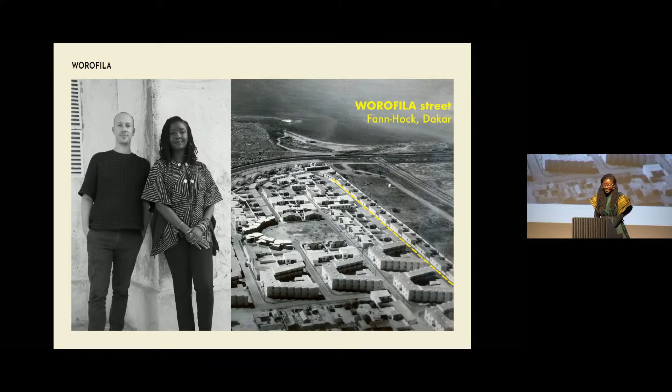So as Jeannie said in the introduction, this is the practice with the co-founder Nicolas. We are based in the historical neighborhood of Fann-Hock, and we borrowed the name from the street that you see to the right. We still have our offices there. This is the place where we met, and the place where we're still located. We're very attached to this neighborhood, which has remained quite residential, and it's a bit of an enclave in Dakar.

This is just to show a few of our projects that we've done in the last 5 years. Many of them have been collaborations with other architects, and they range from residential, public buildings, office buildings, and some exhibitions and research work as well.

So just to start off with the Senegalese built environment, I chose to showcase this map, also to locate where we sit. Senegal is the most western country in Africa, and Dakar, the capital, is the most western city of Senegal, and of the continent, therefore.

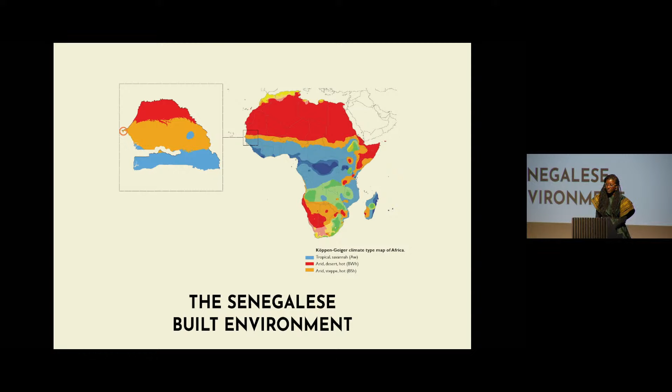This is the climate type map of Africa, so we sit within the Sahelian, arid, hot and arid climate, and sort of tropical savanna climate in the south.

And the reason why context and geography matters is that in the case of Dakar, it's what gave its name. Dakar sits on a peninsula called the Peninsula of the Cape Verde, the Green Cape, because it used to be so green that European explorers, when they first encountered it, named it the Green Cape.

It's very striking to go from something that used to be called the Green Cape to this sort of sea of concrete, all gray.

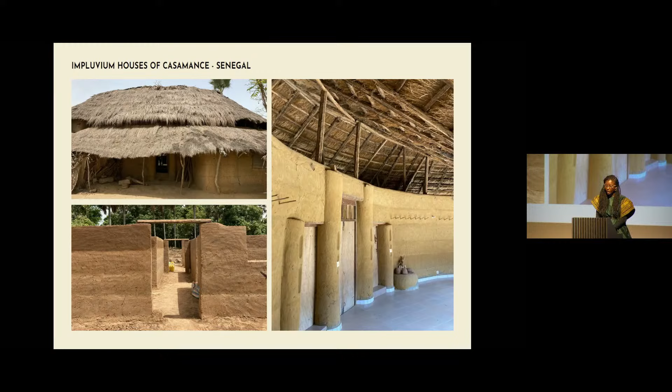The picture at the bottom is really precious to me because it showcases that there are still, in some pockets, remnants of knowledge and know-how of how to build with the same ancestral technique. With this picture we get a lot of information about the geography of the place. We clearly see the type of materials available, from earth to hay to timber, but also information about the climate, since a very pitched roof with overhangs tells us about the amount of rain that falls there.

The impluvium house is centered around an atrium, which collects the rain but also provides light, or is the main source of light. These houses are quite unique because they sit in a context where historically people had to live within the houses, so it actually acts a little bit like a fortress, and you have the ability to house a very large extended family and the animals, usually with a single entrance.

Generally, the atrium, or the rain that is collected, gets kept there, but it can be evacuated usually with a subterranean pipe, which often goes to an outlet where the animals can actually come to drink it.

And the other main important architectural component is the fact that you have this roof that overhangs and creates a sort of shaded walkway around the walls, protecting them from rainfall as well. And the shade also provides thermal comfort.

Another important component of bioclimatic design is natural ventilation, for which we have to look at the various dominant winds. We have two main seasons in Senegal: a dry season that lasts roughly 8 months, and a rainy season which is about 4 months long. During those two different periods we have different dominant winds, so it's really important in designing buildings to position openings in relation to those winds.

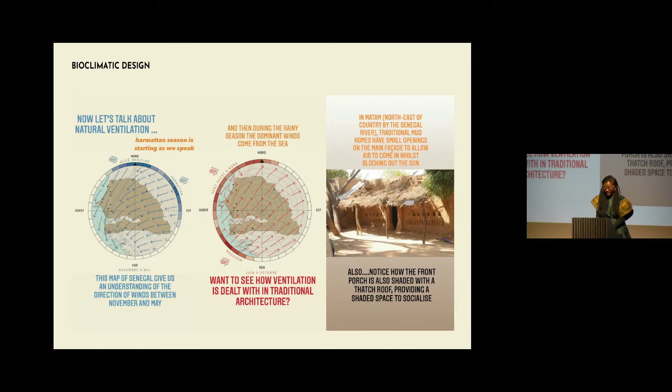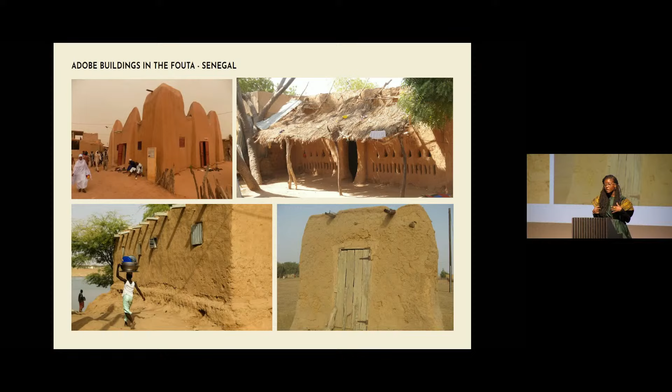This is architecture from the north of Senegal, from the region of the Fouta. The technique there is usually adobe, mud bricks. You can also clearly see that the typologies are very different than those from the south, again in line with the climate in the north, where there's very little rainfall but also very little trees and type of fibers to build roofs. So there's always this interconnectivity between the availability of materials - in this case there's also clay on the banks of the river Senegal - and the climate, and the way in which those materials are put together to fit the specific climate.

There's a very beautiful university campus in Dakar, the University Cheikh Anta Diop, which I think has a very wide showcase of what tropical modernism looks like. We have a lot of examples of these buildings with various examples of solar protection: double skins, brise-soleils, and concrete breeze blocks as well.

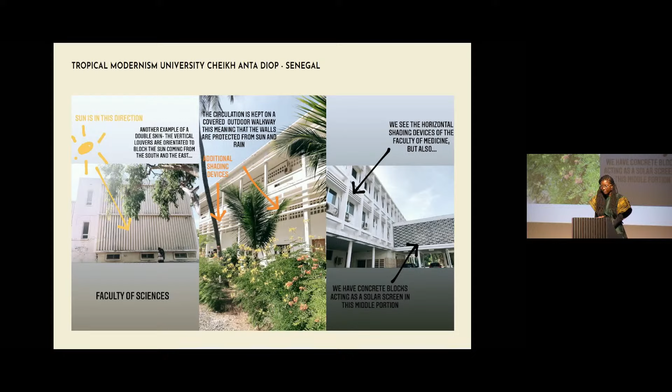So now, starting with really the projects and what we do, it was important to showcase the very basic principles of bioclimatic design, which really have to do with orientation, ensuring that we have natural lighting, natural ventilation, preventing any type of heat gain.

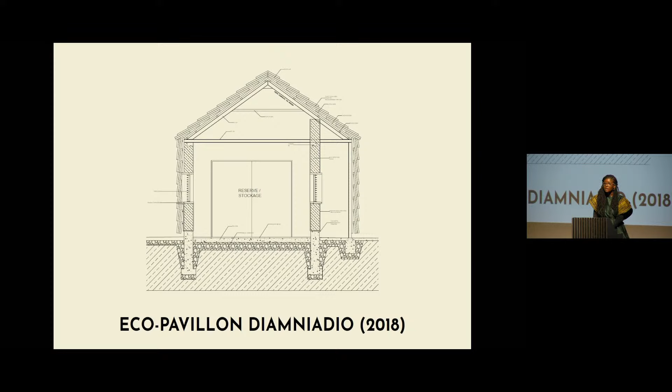This was a project that was commissioned by the government, and the idea was to showcase how earth and Typha could be used in various ways. And what was good with it is that it enabled us to do quite a few experiments.

So this is cut and woven Typha used on an adobe building. This is unstabilized earth, and it was placed on the facade in order to protect it from rainfall, with a very simple detailing of having some metal frames and just hanging these panels on the facade.

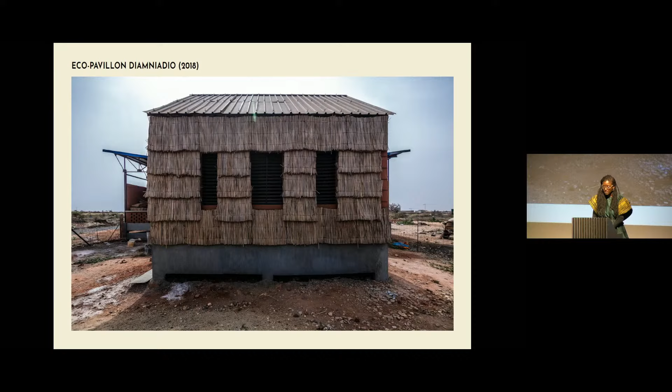And this is obviously also an attempt to kind of create a new language with these sort of bio materials.

Another thing that we were experimenting with is using it as an acoustic ceiling, just using a very simple grid instead of placing plasterboard. The typha was just cut in this 600 by 600 millimeter grid and placed there.

And surprisingly, this is the typology of a classroom. It has really great sort of acoustic absorption qualities as well.

The complex of the building at the bottom is essentially a series of different buildings using different techniques as well. And this was a building that was also meant to be demonstrative and also allow some scientists to make measurements and see how the building performs thermally over time.

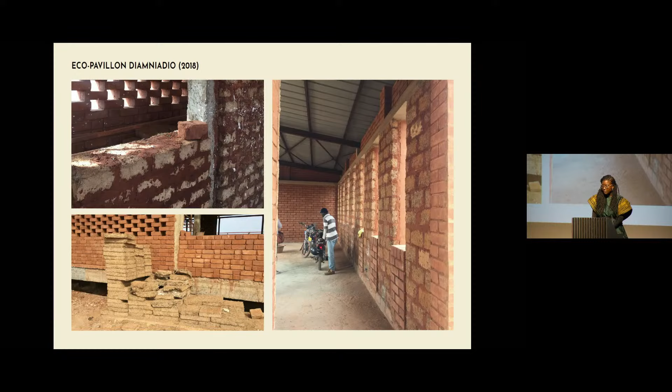Some other parts of the building use a sort of mix between earth and Tifa to make these adobe blocks that can be used, for instance, for wall construction.

There's another opportunity that we get with typha when it's dried and crushed and mixed with clay, it could be used to make these blocks, similarly to making adobes, but these particular blocks are used for the roof and roof slabs construction.

This is what they look like. So it's a very simple process of essentially crushing the typha, mixing it with dry clay, preparing a clay slurry, and then mixing it all together.

Compacting it into this metallic mold, and then taking it out. It gets sun-dried, so it just needs to be a little bit of space to dry it. And then this is the assembly.

If you remember the picture from Dakar, you'll see a lot of flat roofs because of the climate in which we are, and that makes the roof the most exposed facade. It's very much the fifth facade that gets the most solar exposure, and definitely heat and potential for heat gain as well. So this very simple solution, which does not require any additional skill, replaces the concrete blocks that are traditionally and commonly used, and has great potential to reduce the heat gain in buildings.

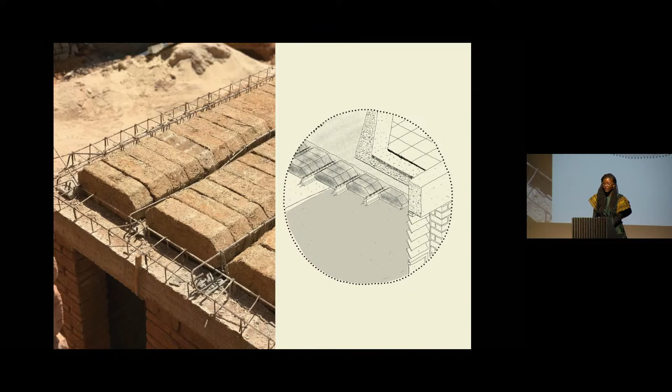The second material I want to introduce to you is earth. In our case, what we work with a lot is laterite, which is a type of rock, or soil, that has a very high clay content. When working with sort of clay-rich earth, it is a very tactile and very visual component. It's easily recognizable whenever you go to a place by just looking at the composition, for instance, in this case, when it's dried.

This is what laterite looks like once it's freshly excavated. But laterite is not the only type of earth that exists in Senegal. There are many other types of clay-rich earth, like these ones, which were taken from a study a few years ago, going around Senegal and selecting all of these different types of clay-rich soils, each of which has different composition and amounts of clay, silt, sand, and gravel.

These are the type of tests that are done in order to understand some of the plastic qualities, mostly of the earth. This is done in the factory that produces the bricks that I'll show you.

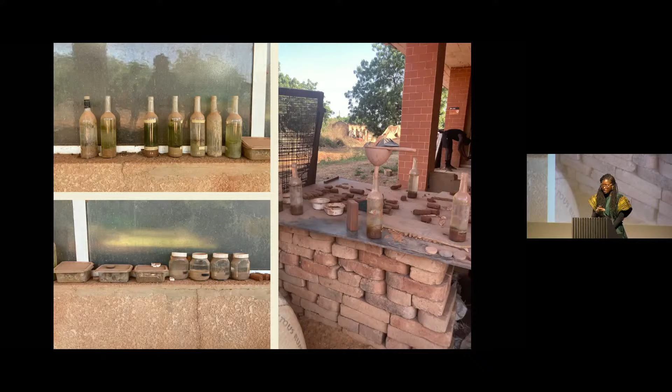These are more images of some of the tests performed. The other one is the bottle test, another easy one to do, where the earth is mixed with water and shaken, and then once it's left to rest, the sedimentation process happens according to the different density of the particles, so you can see the ratio of clay to sand to gravel in each type of earth. So back to the laterite, it's something that is very abundant, mostly in the Dakar, Thiès region, closer to the capital.

This is what the quarries look like. The laterite is extracted either manually or with these machines, and then it's crushed and sifted. Once it's usually brought to either the site or the factory, and then it gets processed.

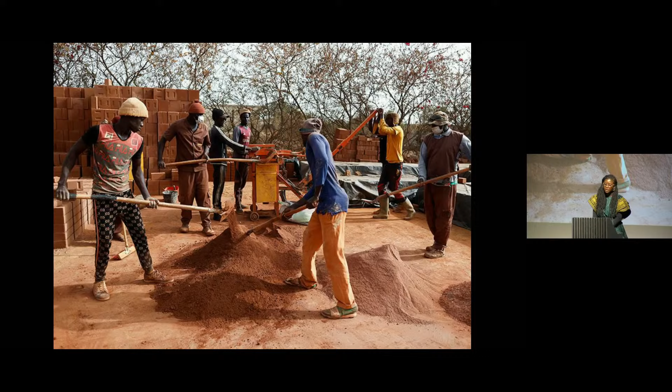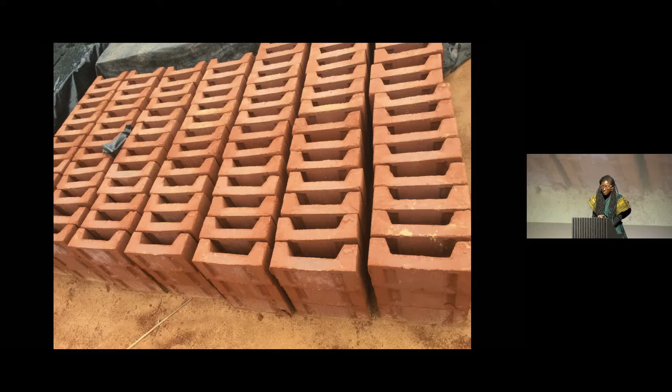These are the U-shaped bricks that are used mostly for lintels and sills, again showcasing how plastic these are.

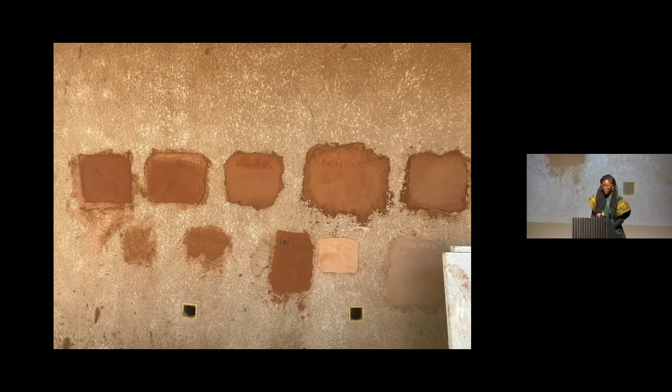These are some bricks that are also made with the admixture of different types of sand found also in Senegal. Some are lime sand, other ones are more dune sands, which change the color aspect of it. And this is in the factory, some tests done for plaster, depending on the kind of mix and ratio between laterite and sand, to see what holds and how it ages over time.

So this is the first project that I'm going to share with you. Sorry, I've left the dates, but the projects aren't presented chronologically. I've just chosen this one because, although it was done for an exhibition, it was a moment for us to display the various techniques and approaches we have to using the earth bricks.

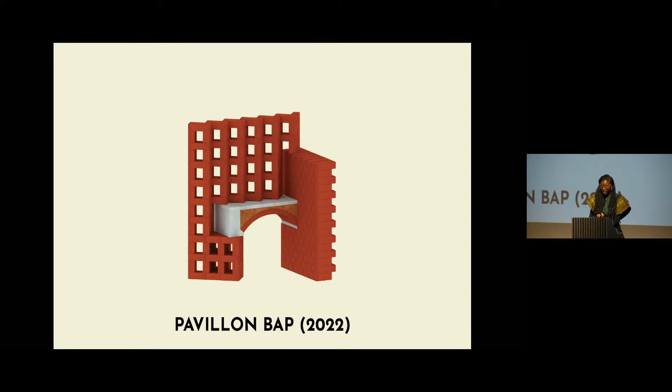So again, going back to this understanding of the climate, we've developed a kind of materiality in which we use these modular elements, assembling them in a way that works for the climate. In this case, this was a reflection on the assembly of bricks for two different types of facades.

So you have the southern facade, or it could be the northern if you're in the southern hemisphere, which is the one facing the equator and gets a lot of sun. In our case, because it's a hot climate, we want to protect the building from the sun. So there's a first showcase of the brick assembly that provides shade onto the wall by having every second course overhanging.

On the other direction, when we look east-west, that's the direction of the winds. Especially in the hot months where ventilation becomes even more critical, it's along the west-southwest, northeast direction. So we have the opportunity to assemble bricks at an angle in order to ensure and provide natural ventilation.

And this is the process of actually building the walls. This was in Versailles, at the School of Architecture of Versailles last year, done in situ with one of our key collaborators, Illuminates, who is the owner of the factory that produces a lot of the bricks that we use. These bricks are made in France.

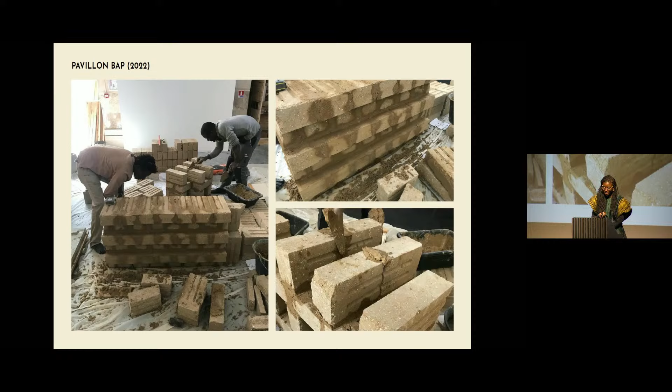Another thing we wanted to showcase is the ways in which we build floors and also roofs. The top one is the beam and block construction technique I've shown earlier, using these earth and Typha blocks. But there's another possibility: using the same earthen bricks to make vaults, because earth has very good compressive strength, so we can make this self-supporting vault.

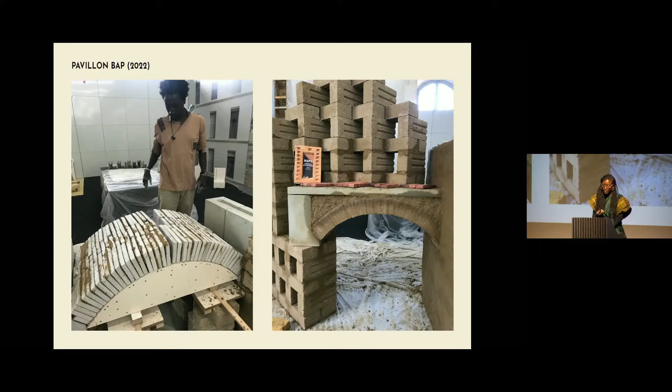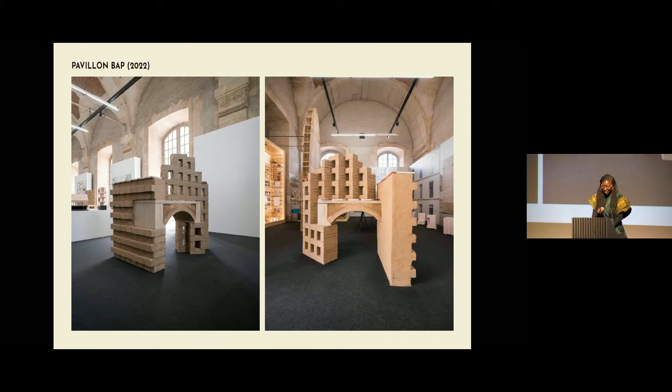For this we actually used some ceramics, so fired bricks. In the assembly, we found a way to combine the north-south wall and the east-west angled walls as well. This vault is infilled with a mix of Typha and earth for either acoustic or thermal insulation. The result is this lovely pavilion that we exhibited for about a period of 2 months, in the interior space of the School of Architecture of Versailles.

So another one of the projects we've done, one of the earlier ones, what I'll share is the process of constructing a dome. This was a house in the region of the Sine Saloum, and this is, I think, the first house that was built. The clients wanted a dome in the living room, and we were able to do it using the earthen bricks.

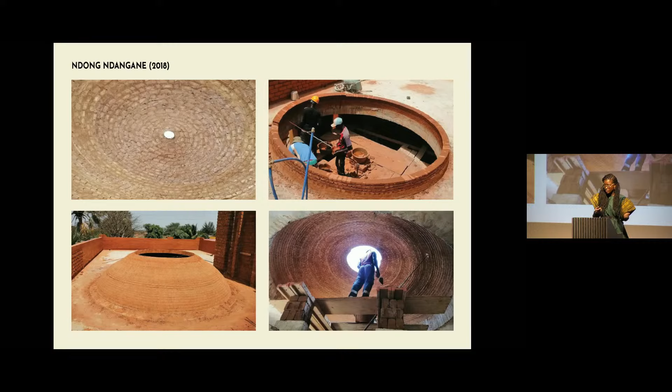This was an interesting exercise to see during construction. There's a type of string or rod that is used every single time to measure the radius of what would be a sphere, in order to ensure that as the bricks are laid by hand, the geometry is respected. The house in general is built using compressed and stabilized earth bricks.

Everything's load-bearing, and the clients as well as us wanted to explore all the load-bearing capacities of earth construction. So there's a display of full load-bearing walls, some arches for the windows, some corbelling in the entrance, domes, and the ability to create these kind of perforated walls using a very careful assembly of bricks.

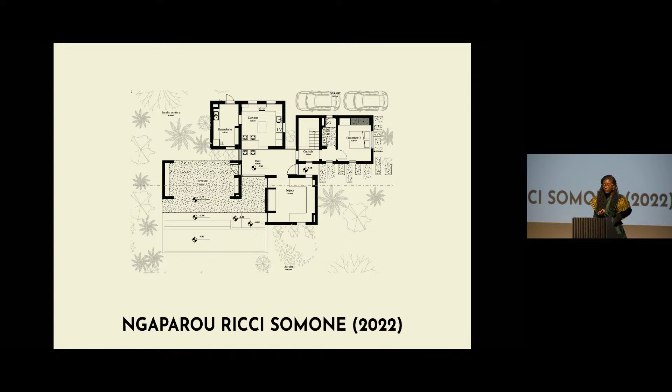There's a second residential project, still ongoing, that also enabled us to continue exploring the load-bearing capacities of these earthen bricks. It's a residential project just under 200 square meters. Other than the terrace, which needed a very large opening because it faces the pool, all the other earthen walls are load-bearing.

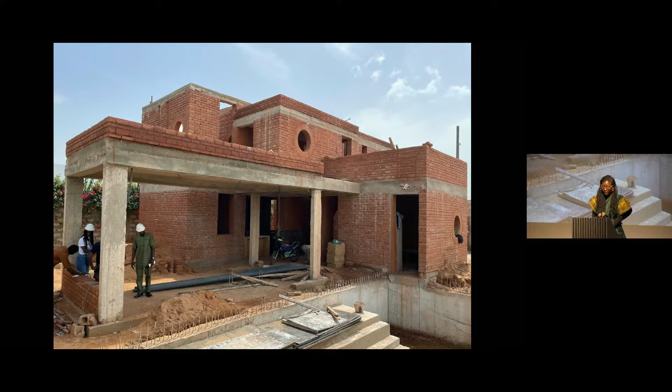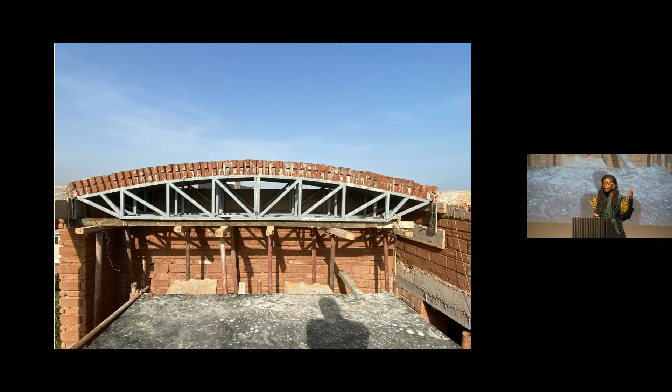The most exciting, and I think most challenging part for the contractor, was making this brick vault, which on the top level is the main roof of one of the bedrooms. It started with the calculation of the vault, which we did in collaboration with Elementerre.

The founder of Elementerre trained at the School of CRAterre. He's an engineer by training, but also knows how to make structural calculations. For the vault, although we have our own methods of calculation, I always want him to check them. He does this through a simple geometrical exercise, sectioning the vault to find the barycenter and create a line of load, checking whether it fits within the geometry of the vault. This was the original one, and it worked.

In the previous project, you saw the dome exposed and not insulated. What I wanted to do here was find a way to lower the height of this vault in order to infill it with earth and Typha for insulation, so the earth brick layer wouldn't be exposed to the sun, since the space below is interior, habitated, and could still transfer heat gain.

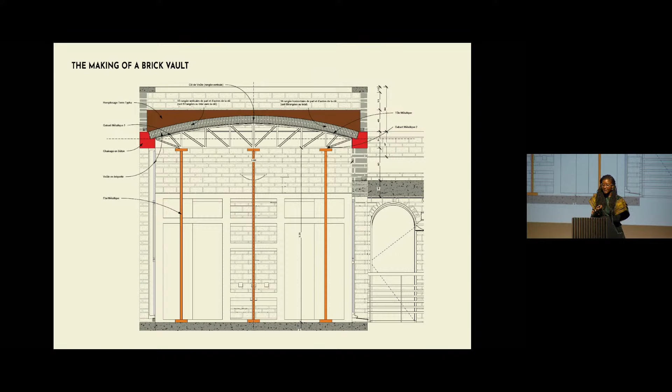We had to design it so it could be taken out through either a window or a door, so it was done in two parts and assembled on site. It could only be about 800 millimeters deep. This is how it was assembled, and on top of it these smaller bricks were placed.

There's a sort of load-bearing - the load-bearing roof structure.

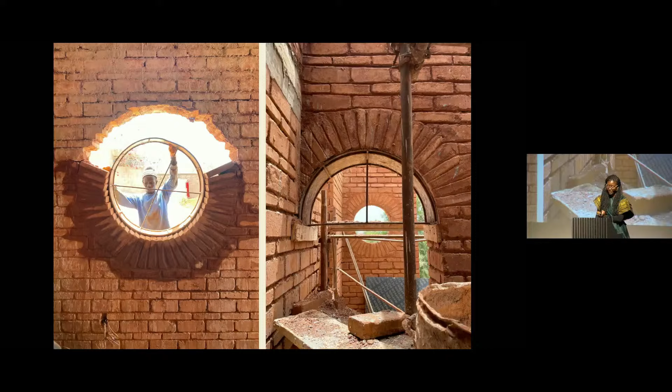It still needs to be finished, but this is what it looks like. These are the other processes - although the one on the left is a corrective measure, because the initial circular window wasn't done properly, so it had to be taken out and redone, mostly because the shuttering used for it, which is just a metal frame that can be reused on site since the circular openings have the same dimension, wasn't perfectly round and wasn't sturdy enough. So you had a kind of initial deflection.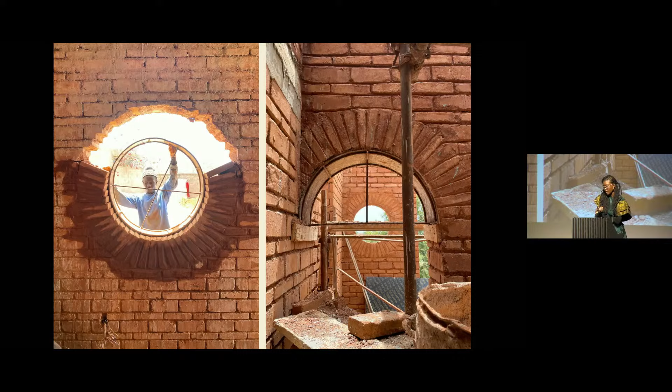The same methodology is used to make these arch openings, and this is the result of it, and me on site.

One more project that I want to mention, that was quite defining, is this house, which became the ground for a lot of reflection and experimentation, especially with local material. This is the first project that I oversaw in terms of construction. I think it was definitely the biggest teacher in terms of bioconstruction locally.

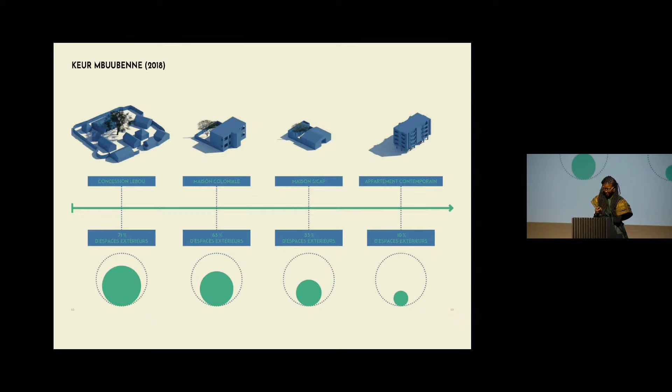The first thing is that this is also an extract from another research project looking at the evolution of housing. You can see that traditional housing is this aggregation of rooms around a central space used for gatherings, eating, and communal living. Over time, what we realize is that you have this evolution of typologies, and nowadays a lot more contemporary construction or housing takes the form of apartment buildings.

The plan, or at least the composition of the house, was done on an existing concrete build that was not finished. It had this L shape, and I thought it could be interesting to actually recreate for this family house the cellular structure of the traditional compound. This was done by reusing the existing concrete, but also making sure the extension was built with earthen bricks.

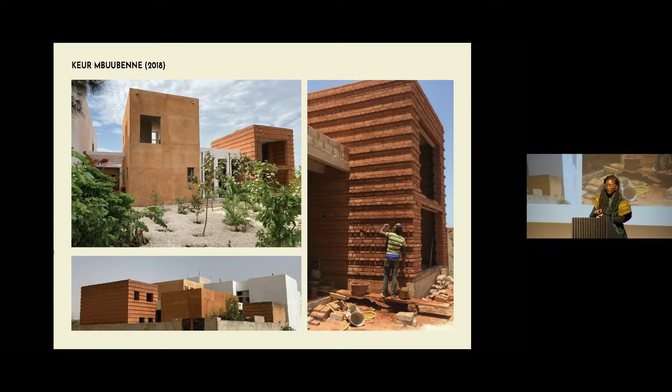The bit in concrete has just been plastered using a cement plaster, but it's stabilized and colorized with laterite, while the other ones are just the naturally raw bricks. You can see the detailing with these overhanging bricks that also create shade onto the walls.

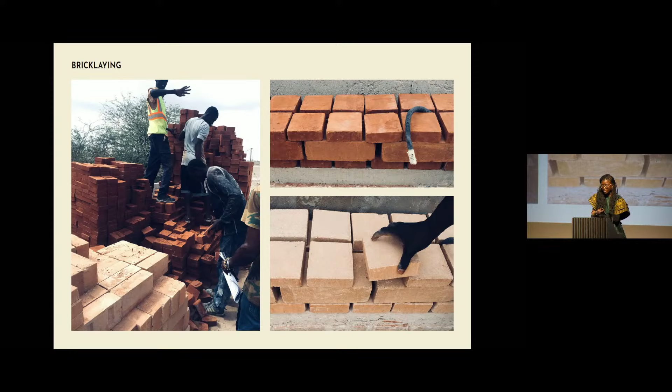I'll just walk you a little bit through the process of bricklaying. When working with this particular technique, the assembly of the bricks is very critical, because in order to make load-bearing walls, we have to control where we put the joints and ensure there are no vertical joints. For this project, there are two different types of earth mixes used - one mixed with lime sand, which is why it has a different color. But both had, not similar, but had load-bearing capacities.

In the bricklaying process, we usually have to plan and lay out all the bricks, all the courses, by just laying them without any mortar, come to site, check whether there are any discrepancies between what has been built and what is in the drawings, correct them, take pictures, and then dismount them and rebuild with the mortar this time. It has to be very carefully checked, because since it's repetitive, the first courses have to be right.

All the courses are drawn, including in 3D. This helps us quantify the amount of bricks needed for production, and identify if there are any custom-made bricks needed to fit the corners. We obviously avoid them as much as possible, so it's only the gray ones that are custom-made. Most of them are modular because it's the nature of the material.

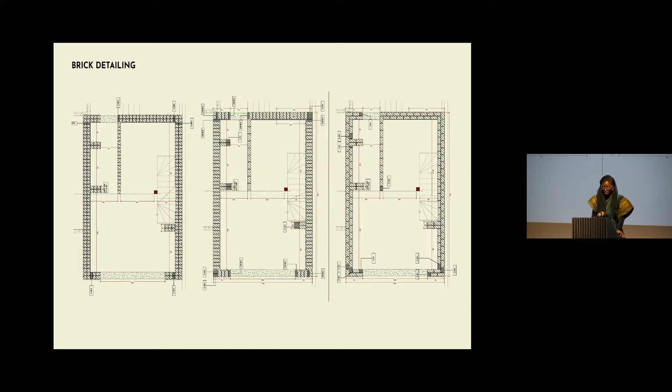The brick detailing is also presented on the facade. I think it always helps because often the positioning of the openings isn't always very clearly understood, nor the heights, etc. So this I find is really helpful on site.

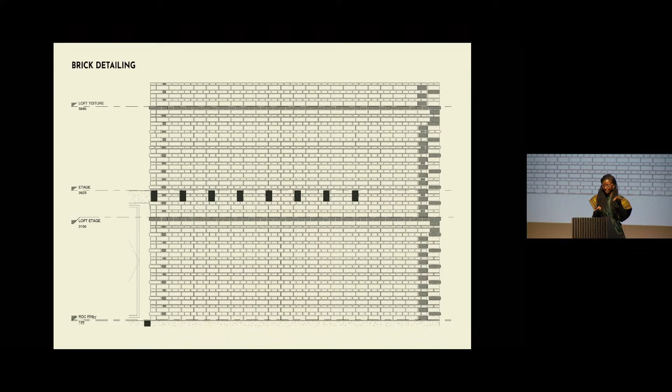All the facade openings. For this particular project there was also a challenge because the various four volumes surround the communal living space, and there are these beams that were anchored into the beam of the earthen volume, but the detailing was done to hide it, so that also had to be carefully coordinated.

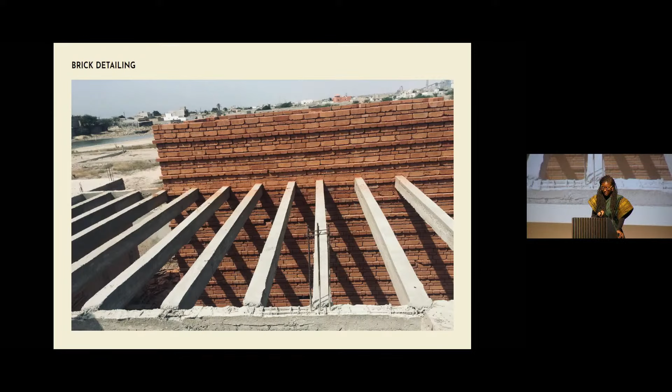Generally, particularly with this project versus the previous one I showed, you could see the horizontal concrete beam being expressed, but with this one I wanted to ensure the volumes read as each their own, with a continuous brick facade. So you have to find a detail that allows for lintels and beams to still be there without seeing them once you lay the bricks on it.

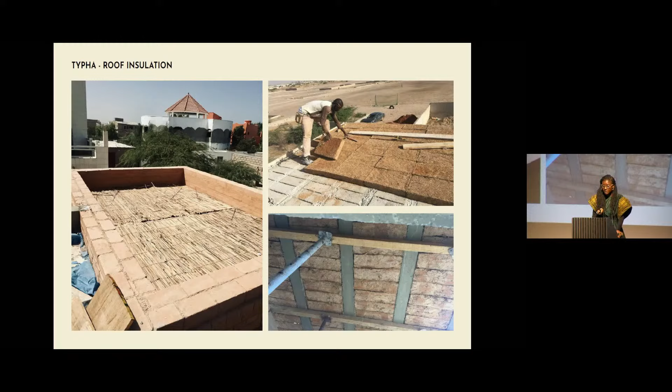On the top one, they ended up using concrete blocks, then putting panels of Typha and earth on top. On the left one, it was actually only the woven Typha panels that were available. It's there as a layer of insulation, so I think it worked similarly.

With this project there was also an opportunity to use another material not very available in Senegal, since it's a Sahel region, but in the south or in some capacity there is some wood. This was used on this particular project because it's close to the sea, and anything metal corrodes very quickly. So using timber was a choice of sustainability and durability.

There's detailing of the openings done to ensure security while also providing light and ventilation. This was done using a carpenter right next to the office, which is very practical since we can check from the office window, take pictures, and regularly go do checkups to see whether it's done according to the design.

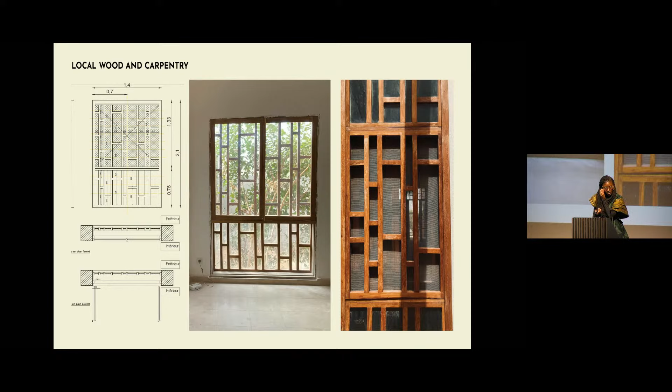This is some of the examples of the openings. The idea was to have a fixed panel at the bottom - full height openings designed to bring in the maximum amount of light - and the ones in the middle or top are operable. On the inside, and outside you have a mosquito net to ventilate but prevent mosquitoes from coming in. This is what it looks like from the living spaces internally.

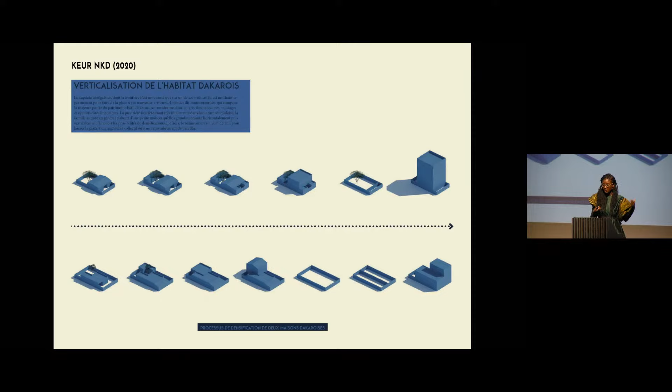Another really important project for us is a house in Dakar, so now I'm going back a bit into the capital. I think it's one of our most important projects because of the reflection around housing and the verticalization of housing in the city. Over time you see how low-story houses grew and expanded until they got demolished to give rise to buildings, or got demolished and the parcel subdivided in order to make higher buildings as well.

Just to showcase the massing strategy - it's funny because I had a discussion earlier about urban planning, and yes, we do have urban planning laws, unfortunately they aren't very respected. For this project we actually managed to respect every single one of them. One of the things it stipulates is that you can only build on up to 70% of the parcel. So the first thing we did, because of the small plot, we obviously wanted to maximize the footprint, but we created three atria in order to allow for light and ventilation, and to ensure we didn't exceed the allowed footprint.

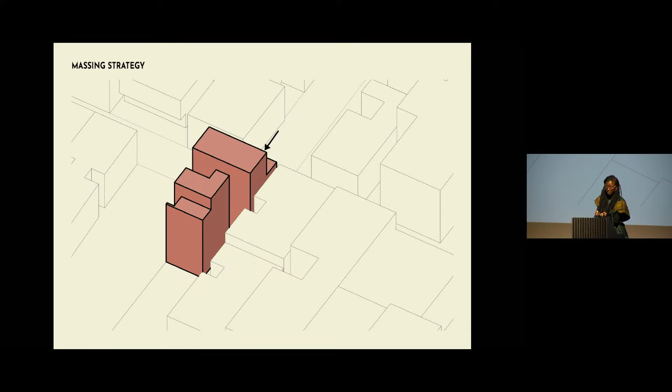Then the second condition is that over, I think, two stories, or by the third story, there had to be an amount of setback from the street, which we did on both sides as well. There's only one side that is a street, the other is meant to be a neighbor, and it's always requested, I think for light, to allow for light penetration. This gave rise to the morphology in which on the first two stories we've been able to build up to the street front, and then later have these setback balconies, generally fitting and respecting the urban line of the neighborhood.

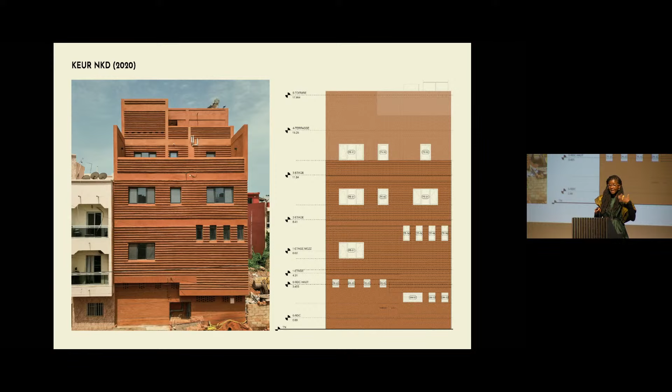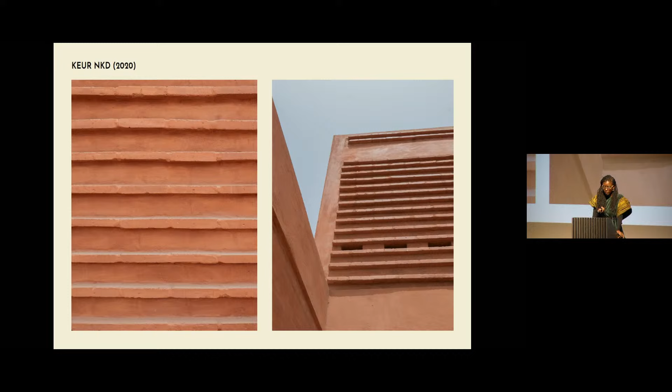That's the brick, the overhanging brick detailing once it's finished. There are also small openings, again for ventilation, especially in this top roof room, which is for solar batteries actually, but we had to ensure they stay ventilated.

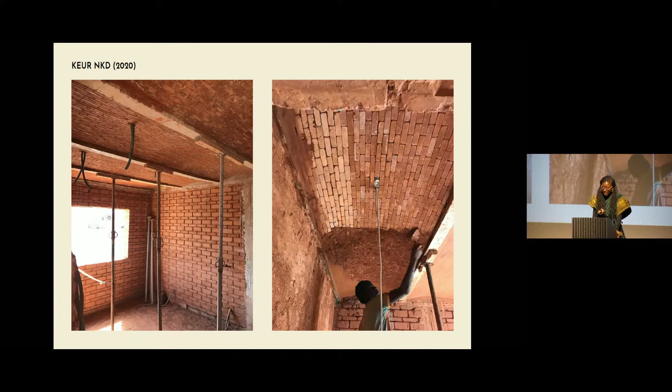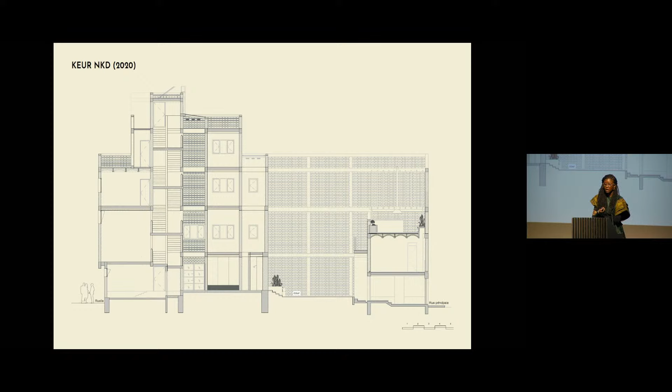The house has one of the atriums adjacent to the staircase, and given the height—this is a 4.5-story building—this is a very important component for ventilation. In the section, you can see the stairwell and then the atrium, which is covered by a skylight. This is quite interesting because it brings a lot of sun, especially in the cooler months when it's hot and dry, and it's just a passive strategy for natural lighting and ventilation.

We've also used a pool in the bigger atrium, which is used for evaporative and passive cooling through the process of evaporation, which lowers the heat load, and then the air gets circulated throughout the buildings.

This was also an opportunity for us to investigate another type of locally produced material, the ceramics made using laterite, but also other types of clays that are sourced. The top right picture shows the pit in which you have the various types of clay that are humidified and mixed for a few days before getting made into a paste and cut or molded into whichever shape is wanted, then fired in a very small oven.

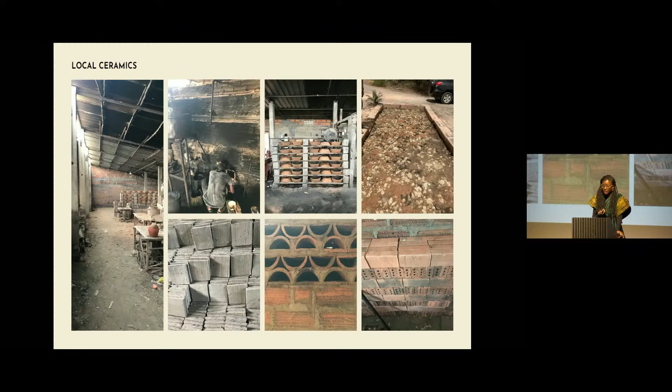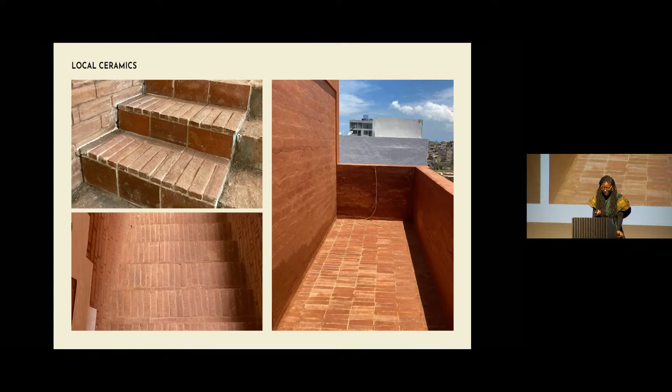This is a sort of father and son company. The father is a classically trained ceramicist, one of the last of his generation, and has been the main supplier for these types of bricks that we then use on our projects, mostly as floor coverings. In this particular project it's used in the stairwell on the inside, but also outside on the terraces that we had to create because of the required urban setbacks.

I'm going to walk you through quickly some of the cultural projects we've done, which are a bit more recent. The previous projects I showed you were mostly residential, and these two projects I'm about to show you are places for exhibitions.

The interior space of the gallery has these load-bearing walls actually made with laterite blocks, and then an internal metallic structure that supports a roof that is very high up.

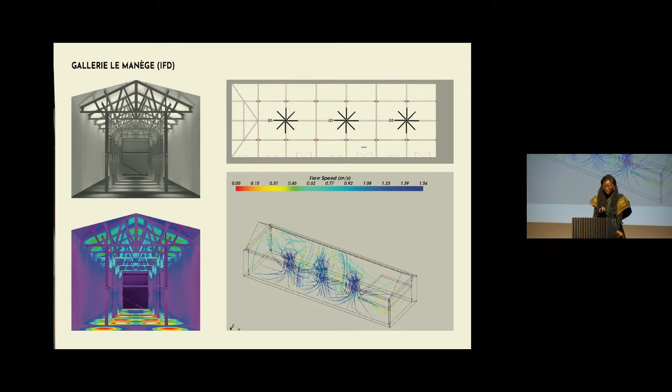The second thing that was important to us was to find a way to ensure there was enough airflow, which we proposed with some fans—though I think those have by now been discarded. The strategy for the space was really to rework the finishes, add the lighting strategy, find a way to have ventilation, and also provide an office for the lead curator.

The project is nearly done, and this is the first exhibition, which is going to open, I think, next week. It's being prepared to be assembled on site.

For the courtyard space, the intention is to have a space that can gather the public, that can be a spill-out space when there are exhibitions, and to also add a food truck onto the right, for which we then needed to add toilets for the public, but also a place for the bins.

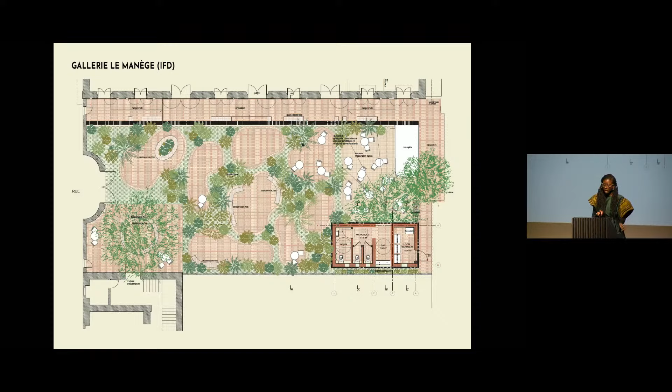So the little roof, sort of earthen structure that you see on the bottom, is really there as a kind of service building. The general strategy was, rather than have this big open space, to create these islands where people could gather and use vegetation to provide a very unique kind of microclimate onto this courtyard.

So this is kind of the intended feel that we wanted to achieve with these various islands. This is the landscape strategy.

We worked with the local landscape — well, not really a landscaper, at least for this context, but rather somebody who is kind of like a plant contractor.

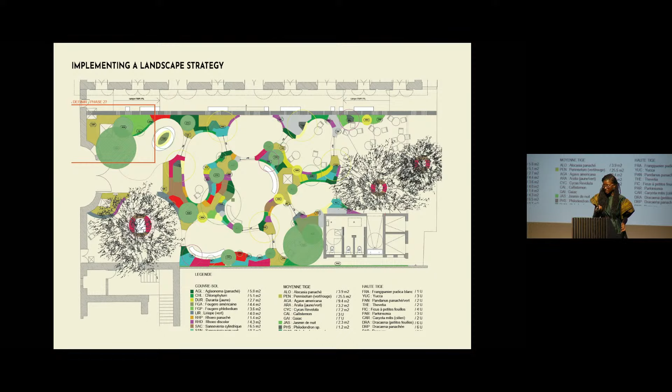We devised a strategy and had to choose the type of plants we wanted to implement, with a different hierarchy. There's some that are ground cover, others that are medium to high plants, and others that are very, very high plants, and we still had to work out the strategy around the existing big trees that were there. We chose the plants with this landscape contractor.

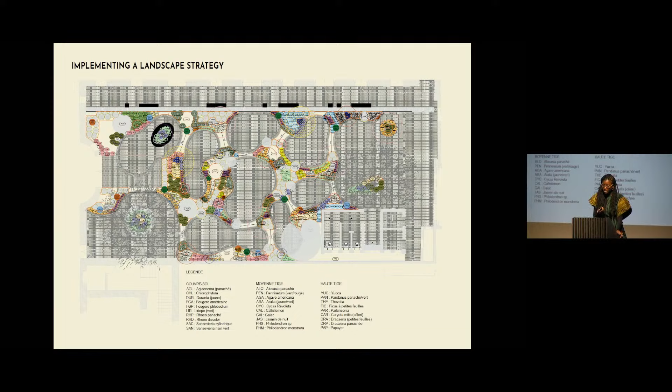Then we had to do a lot of detailed drawing to specify exactly where they are, also to know how many we need for costing and for ordering, because we had to do this at least a year in advance to ensure we'd get the plants that we wanted.

The last project I'm going to share with you is the Rainforest Gallery in Benin City. It's a brand new commission that we're really excited about, because this is the first project we'll get to do outside of Senegal.

We started off by looking at the history of Benin City and the Benin Kingdom, which is famously known because of the bronzes that were obtained after a lot of looting. When you look at the traditional palace architecture, we see again an example of earthen architecture, particularly these walls that are built using the cob technique.

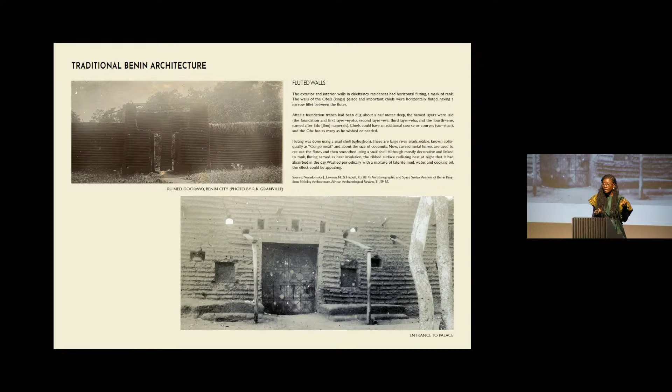What's really interesting here is this sort of fluting, which are engravings in the walls done in order to prevent and slow down erosion due to water.

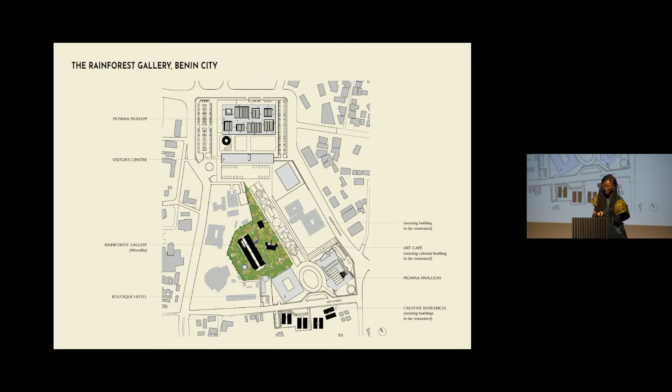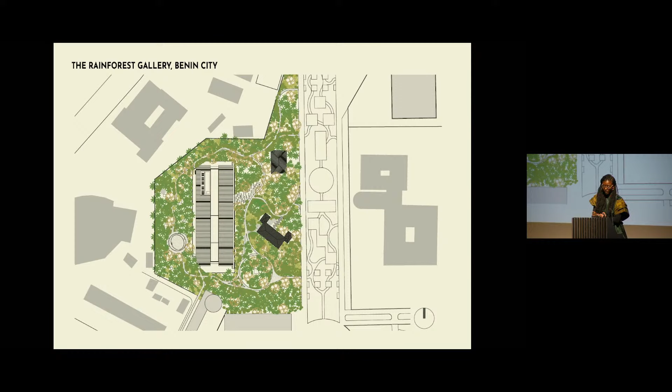There's a big civic alleyway that articulates the precinct and serves as the main circulation, and it's from there that you access the gallery that sits in the middle of this planted forest. This is just a general overview of what it looks like.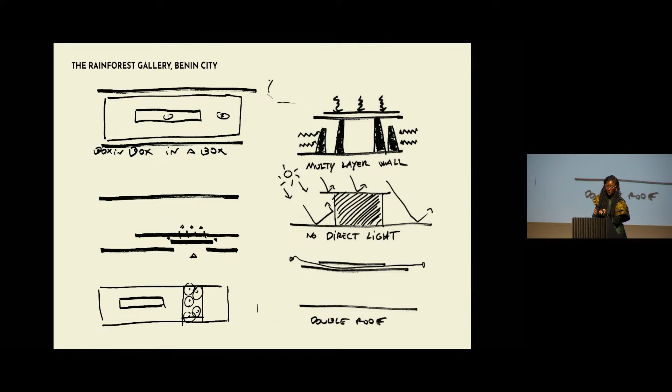The spacing strategy inside was very simple, because the spaces had to be quite large in order to welcome traveling exhibitions. But for us, we wanted to exemplify some of the principles of bioclimatic design, especially in a tropical and humid environment, by protecting the internal spaces, particularly for any sensitive artwork. So we ensured there's no direct light, using traditional thick cob walls to create multi-layered walls, having a double ventilated roof, and creating an entrance sequence that was key to allow visitors to go through the rainforest while also discovering the building gradually.

So this layering is put into place, and the space is divided into two parts: a smaller one with a permanent exhibition on the right, and on the left a temporary exhibition space.

The intent was to ensure that the space around the gallery becomes very public, so people can also experience the landscape, creating an in-between layer between the forest and the building.

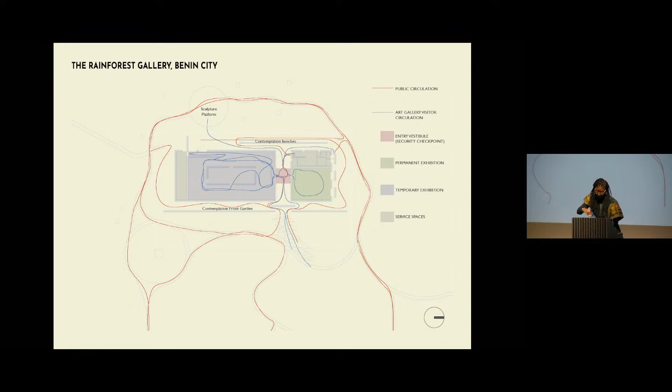The exhibition spaces are very plain—for this concept proposal they're left quite blank. In order to create additional wall space in the temporary exhibition space to the left, an internal box has been created, which is also a space that can be acoustically sealed.

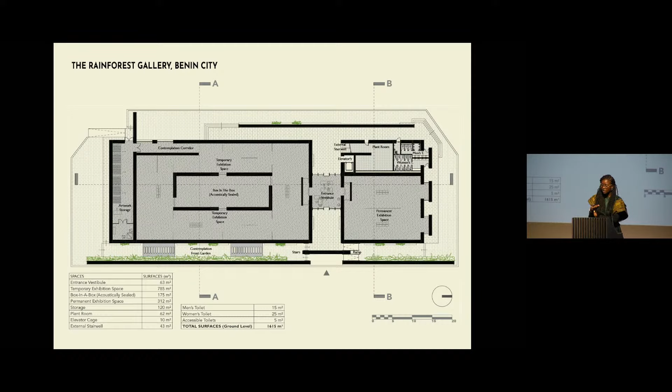The entrance is meant to be clearly marked and very transparent. As you enter, there's a low wall so you can see the entrance from between, giving a see-through visual connection to the rainforest in the back. The external layered wall acts as a threshold, and you can see the traditional fluting technique that was used in the palaces.

These are the sections, and with the box inside the box, you can see how it does two things: it creates a different atmosphere in a space that is acoustically sealed and has no direct lighting, but by being lower, it also allows us to split the temporary exhibition space into two, ensuring clerestory lighting on both.

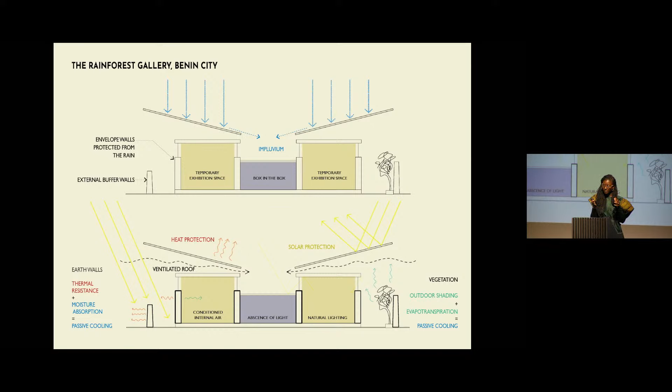So this is the general strategy: a mix of the impluvium to collect rainwater, ensuring we have lights, ensuring the double walls create external buffers and in-between spaces, the roof, and we have a sort of ventilated inverted roof as well. One requirement was to have a level of air conditioning because the temperature had to be kept quite low, so we wanted to ensure the space is very thermally efficient by not seeping any air out, and using biomaterials which contribute greatly to the humidification of the air and subsequent comfort.

The interior space shows walls built with earth but lime washed to be clear and provide a lot of lighting. The roof structure is in timber. With earth, the thinking is to leave it raw outside but lime wash it inside, work with local teak, and use granite tiles or locally sourced granite for flooring, and have also back spaces like a sculptural garden that can be enjoyed as you walk around the gallery.

The last bit of the practice I want to share with you has to do with research and collaborations, because in addition to co-running Worofila, there are many other projects I've done from the beginning of my time in Dakar that have informed me a lot about the place, what the identified needs are, and a way to continue to reflect on the practice but also expand it by working with other people.

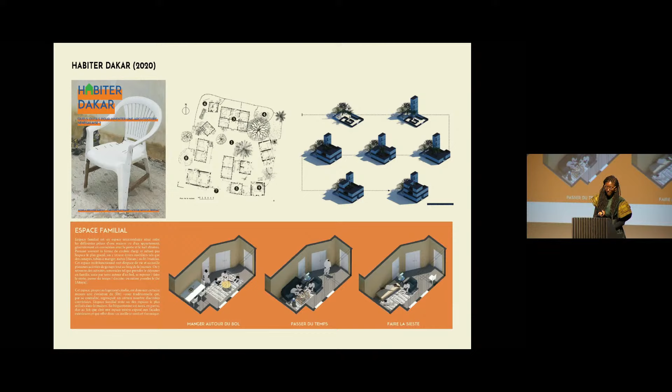The first one is the Habiter Dakar project, funded by the Goethe Institute, which allowed us to look into the history of housing and try to understand why we find ourselves with housing that isn't adequate for people. We looked at various scales, from the very intimate scale and the rituals performed in domestic spaces, to thinking about the verticalization of the city and how we can provide a type of modular housing that allows people to expand the housing like the traditional compound did.

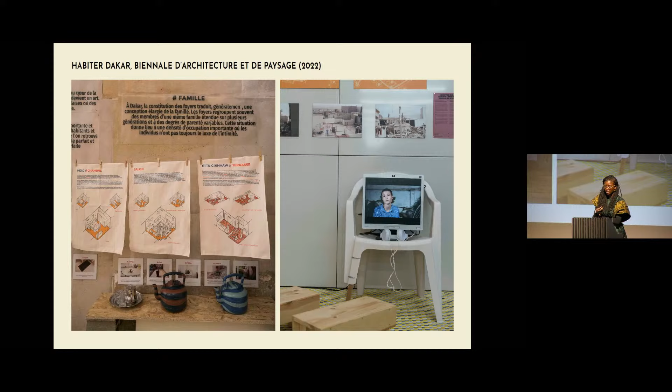This is my research partner, Caroline. We did an exhibition at the same Biennale in Versailles last year, showcasing elements of domestic spaces and furniture that shape the occupation of space, and also presented various drawings of the rituals, images of the city, and especially the mutation and evolution, particularly vertically, of the city.

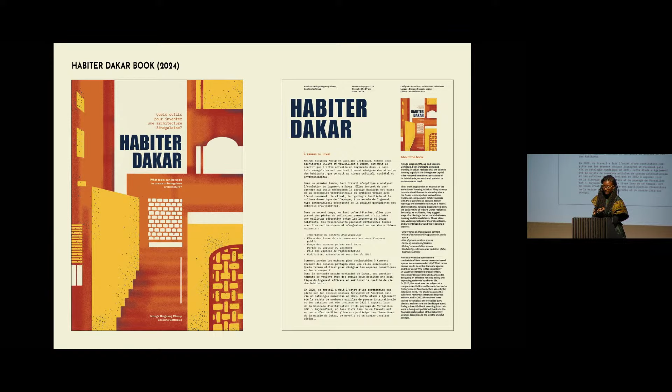We're currently working on publishing a book to make the research even more widely available and also provide new content. This is a mock-up of the book that we're working on with a local graphic designer, Anna Diagne.

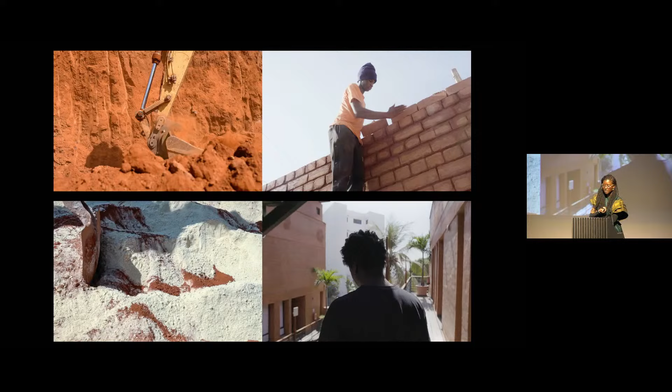This is from the Biennale, where I was selected with Doudou Dème of Elementerre, the engineer who trained at CRAterre and is our main collaborator, and Sherif Tal, a filmmaker, to produce a film about not just the story of Elementerre but showcasing the various processes of working with mud and these biomaterials and the thinking behind it. This was done as a film about 10 minutes long, which you can see at the Venice Biennale. This was also a big departure for me because I produced the film and learned a lot in the process.

Dakarmorphose is the project that looks into the history and inception of Dakar, which used to be occupied by indigenous people called the Lebou people—at least those are the ones we consider indigenous. There were other people before that left the peninsula. You can see the location of these traditional villages.

What was really fascinating for us is that you still see traces of traditional urbanism in the city in the form of compounds nested in between the very formal colonial-like planning. They're called penc, and they are essentially social political structures that are the strongholds of families.

We did an exhibition in one of those compounds, one of the penc—this is the penc of Mboup in the city center. For us it was important to look at it from a historical perspective, using postcards for people to understand what the city used to look like and see how it has gradually transformed.

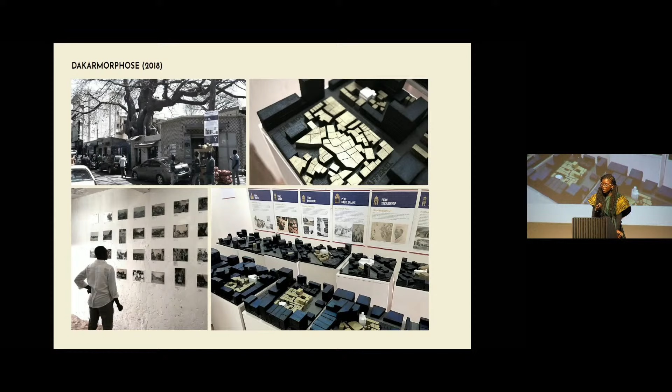But obviously, my research partner and I, being an architect, it was also important to understand what the fabric of these places were in the city, and also to be able to talk about the culture and the social political fabric of the community, which is what has enabled them to resist and still be present today.

This is Carol and I. This year, this research was informed by the work of an artist called Mboup at a gallery in Dakar, and he was looking at the way in which the city transforms through his art and how people interact generally with the built environment.

So in the archive room, they had one of the maps showcasing the gradual transformation and displacement of the traditional villages.

The work has evolved, so the research work of Dakarmorphose has evolved into thinking more globally about architecture and heritage in the city. And we wrote this article, which was really a conversation between us to find a way to put words and define what is architectural and urban heritage in Dakar, and why it is important to us with our respective practice. And what prompted this reflection is the gradual destruction of a lot of listed buildings in Dakar, like these two.

The one at the bottom, on the left, is the maternity that was built in the 30s in this Sudano-Sahelian style. The building had recently been renovated, and about a year or two after it was renovated, it was demolished in order to make ground for a new modern hospital and to allow for land speculation and sell off the land.

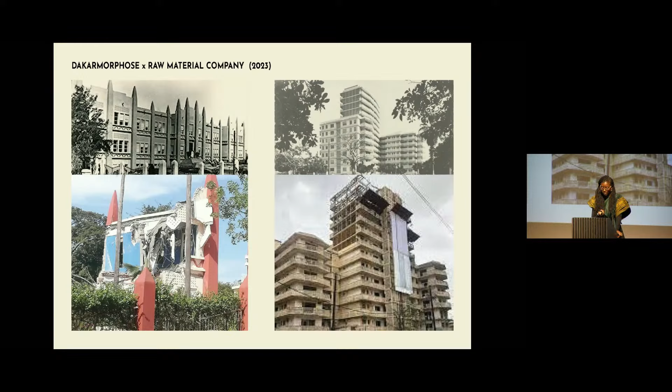The one to the right is another modernist housing building that got destroyed. I'll just finish with this one in particular, because this was another building that got demolished, called the Studio Chomette. It's done by a French architect called Henri Chomette, who worked a lot in Senegal and in sub-Saharan Africa as a whole.

This building also used to be the national office of architecture of the Ministry of the Built Environment, so it was a very dear and important building for a lot of architects. What I find really interesting is the way that, although this is part of this modernist ethos, you could see the use of local materials on the facade, which is actually covered with shell concrete, locally sourced.

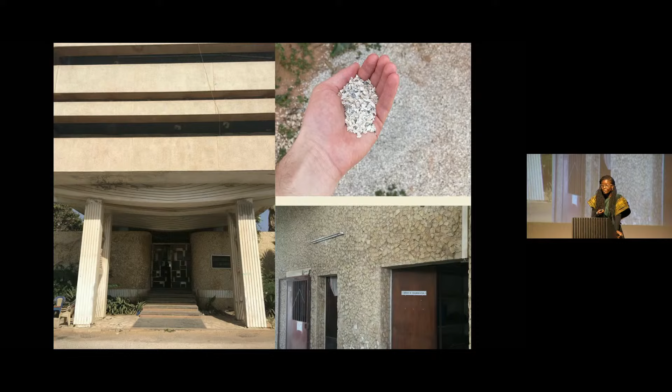You also have some of the walls that were covered using locally sourced limestone, which people don't use anymore because the limestone is used to actually produce cement. And internally you had this spiral staircase with really beautiful metal work, which again we don't see in the current language of architecture, because aluminium has taken over. It's steel, aluminium, and glass now.

And also the use of locally made ceramics to create these very unique patterns, which, as you could see from our architecture, is something that speaks a lot to us.

So the thinking is to actually work on an exhibition for the end of the year, for December, and to find a way to retell the story of many of these buildings—not just buildings, because we've also chosen one of the public gardens. Particularly with this building, the thinking was to say that even though it has been demolished, there's a lot of elements of heritage, particularly in the knowledge of how to make—either the making of the ceramics, the making of this shell concrete, or of this metal work—that is still available. So we still have that kind of knowledge system; we just choose not to use it in our architecture.

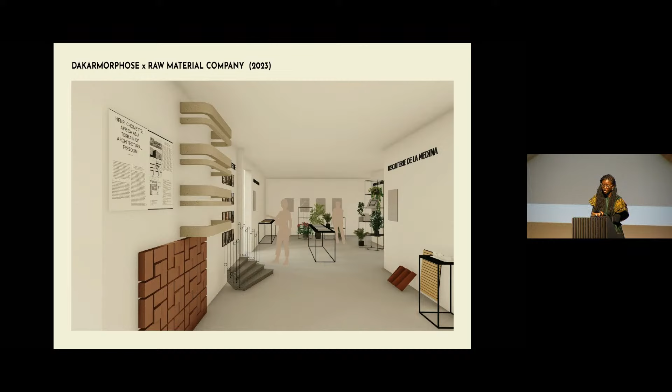So this is just one of the mock-ups of the exhibition, hopefully, that opens in early December.

And I will just finish off with my latest main collaboration, which is going to be with the CCA. As Jeannie mentioned, I've been appointed—very grateful to have been appointed—as curator of the CCA C/O Dakar program, which was announced at the Venice Biennale this year. This is me and Giovanna. I will be heading off to Montreal for the next two weeks for residency, so I think you'll be seeing a lot of me in Canada for the next three years. I really look forward to sharing many of these research projects with you.